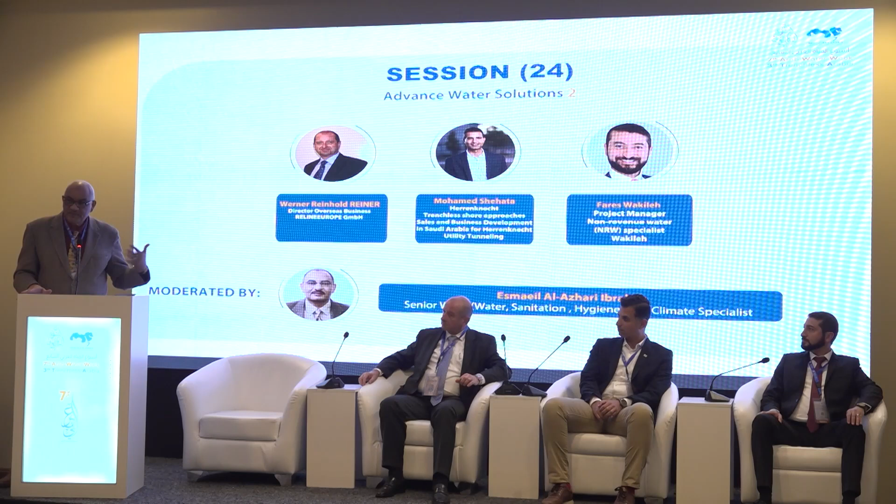Let's start with an international lesson learned by Werner.

Werner has a civil engineer background for 33 years. He's actually younger than me by 1 year. I don't want to mention the age, I'm over that step. Excuse me, do you understand English? English is fine, yes, they are. We understand. And he's more younger than us.

Thank you so much, this is very encouraging. He has been working in the pipeline industry and sales, and he has worked in lots of places, such as, of course, he started in Europe, Asia, South America, and Australia, and Africa, and probably in the Middle East also he has done some work. He will be talking to us about it.

I forgot to mention to you, my name is Esmaeil Ibrahim. I work with Aqua as a senior water, sanitation, climate consultant. Worked for United Nations for 35 years. And now I'm also a senior water and sanitation, climate policy analyst, part-time with United Nations. Werner, you're welcome to the presentation, and let's interact.

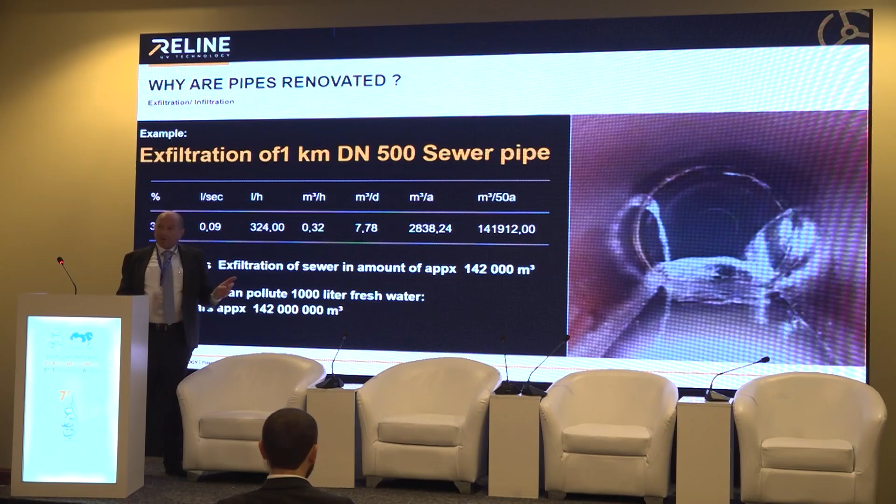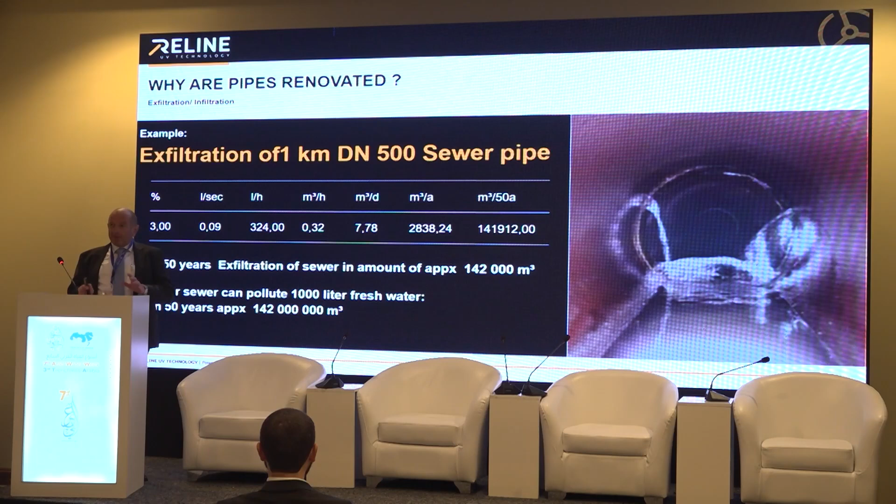If we understand that in 1 cubic meter of water, 1 liter of sewer pollutes it, and I'd say even more than that, you won't drink it anymore. Multiply this amount by 1,000, in 1 kilometer of a small pipe, we pollute 140 million cubic meters over 50 years. This is what a cracked sewer pipe causes to the groundwater, where groundwater is precious for potable water.

Europe. Loss of water from source to the well, on average 30% loss. We have countries on earth with 50-60% loss. I know Jordan is not less than 50% loss of water. The lack of water on one hand, on the other hand, we are having the water, and we are missing it over a few kilometers, half of it.

One step back. How long does a pipe last? Literature and experts say anything between 60 and 150 years. I'm pretty sure it will not be 300 years. Any asset owner can make his own assessment. He decides his pipes last on average 200 years, and he's happy.

If you take the 150 years and deduct 50 years already elapsed since construction, it's an easier calculation for me, 100 years. If the average life cycle of a pipe is 100 years, that means any asset owner needs to renew his network by 1% per year just to keep the status, with no improvement, because the other 99% will get older already. So every year 1% to keep it.

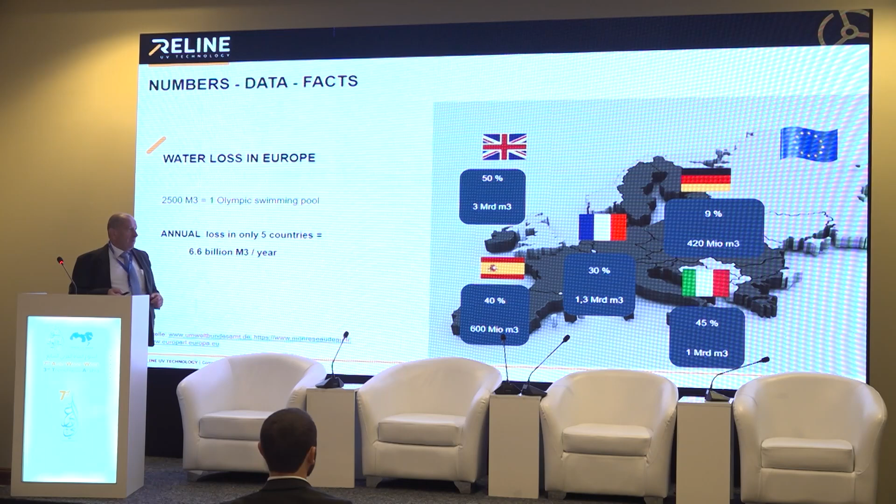In Singapore, they do renovation now at 28 years. They have a simple rule: in the age between 20 and 40 years of pipe age, they make inspection. If they find something, they renew. If they find nothing, they leave it. Anything beyond 40 years gets general renovation. They've got the money, okay, they can do that. This is their rule.

China has public pipes of 3.4 million kilometers, sewer pipes about 1 million, and they say the 100-year rule would mean 18,000 kilometers per year in the country. They say every 50 years, same style renovation. We are financing China, they can do it.

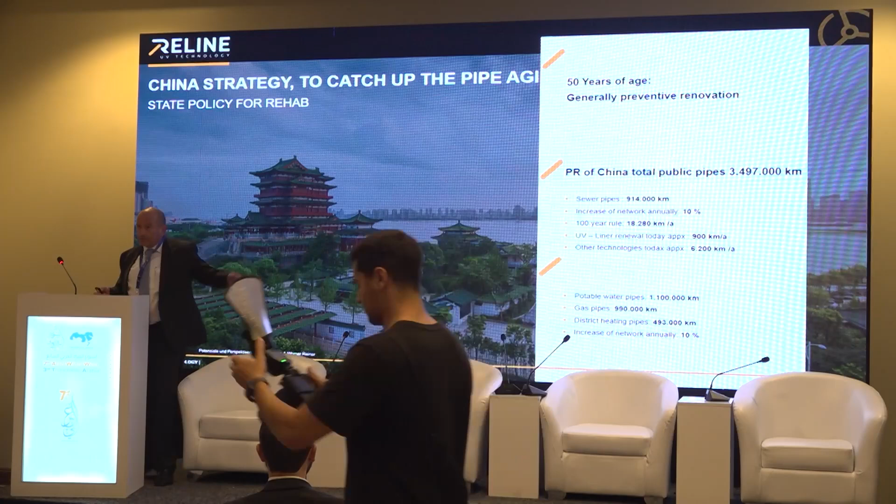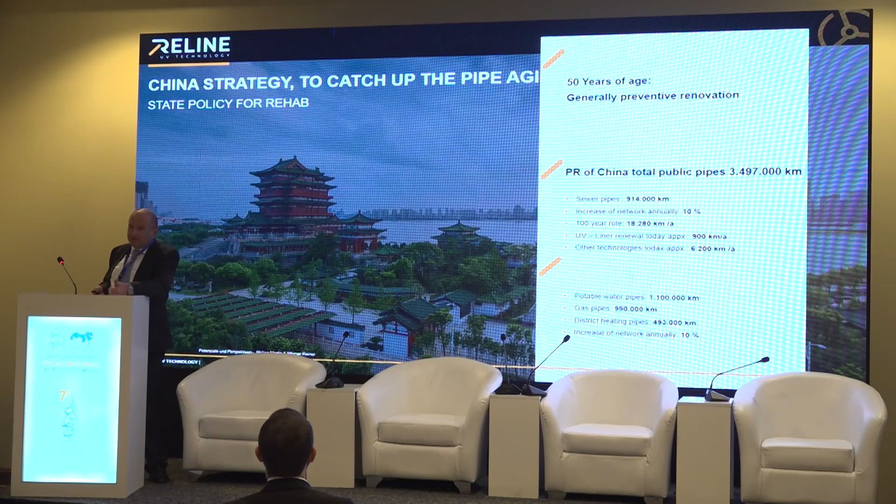Other countries need to look at our spending. We don't have that kind of resources, but we need to be aware that 1% or 0.5% is a guideline we should go for. This is what I said before: take the calculation, 50 years consumed, 100 years remaining, 1% in general, with discussion of the local situation which depends, but we are plus or minus there.

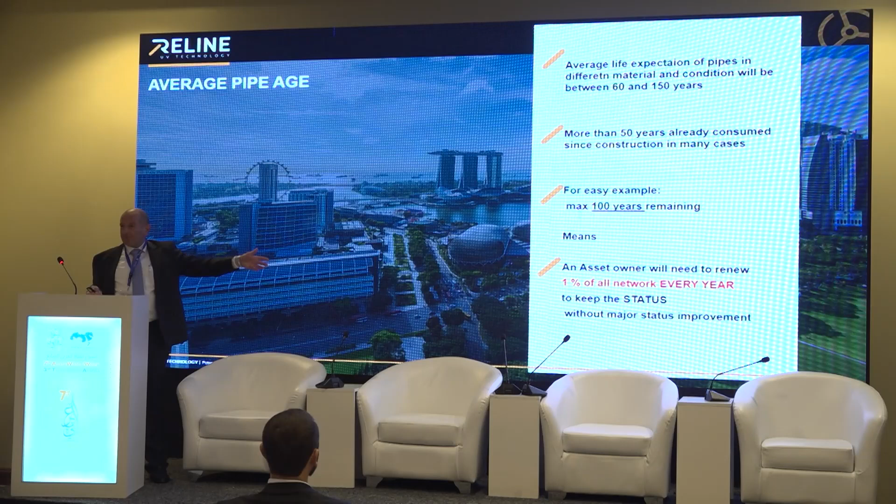What can we do? We can do open cut. I'm coming from construction, so this is a good solution. But I doubt that we have the time to reconstruct everything in dense cities with open trenches. And I doubt that we have the money for it. But I think the time is more nervous and sensitive than the money.

In the inner cities, we can't open the road anymore like this in the metropolis. So lining in general with different systems is a good option. I want to show you one of the options. There are several ones for slip lining, and we can do different methods.

The demand of lining is the quality of a new pipe. I don't talk about repair - repair has a short lifetime expectation of about 10 to 12 years. I talk about renewal, meaning tightness, stability, duration, and performance in practice like a new pipe. This is renovation, and the ISO standards say not less than 50 years - not about, it is 50 years. This should be a minimum assessed by standard-based assessments, not less than 50 years. That's why my calculation came before on the 50 years.

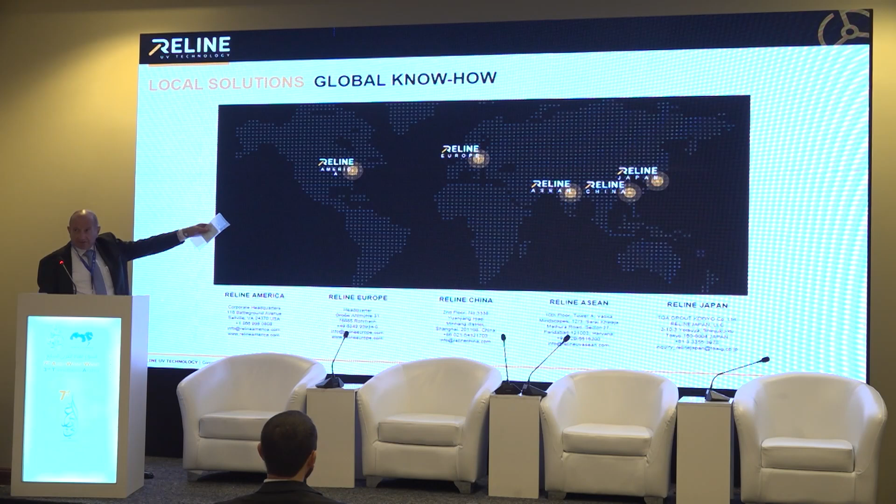We serve different regions, America, Europe, this is where I'm living. We had started a factory in China, but after COVID we skipped that, we couldn't access it for a year. The building was there, and then the government rule prohibited us to continue, so we stopped it. Maybe it wasn't too bad, because I see a lot of copying going on. We have 2 factories in Japan, because they do that for earthquake protection.

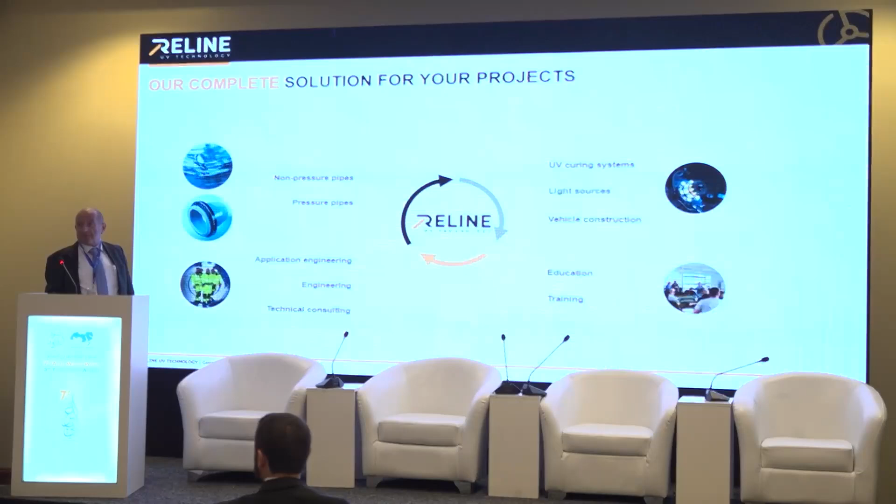For non-pressure or gravity pipes, and pressure pipes, we handle potable water or any other medium, raw water, industrial, not oil, not gas. We provide the systems, the curing systems, and we do training and education sessions to enable local companies to install the materials.

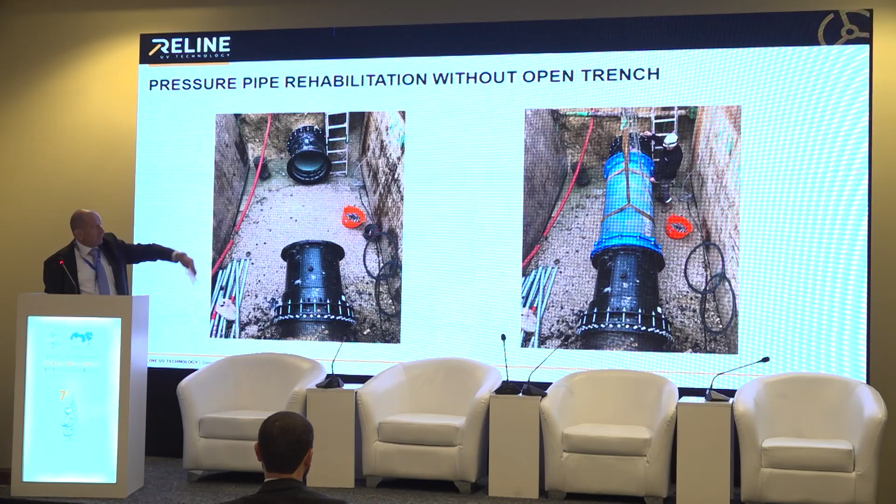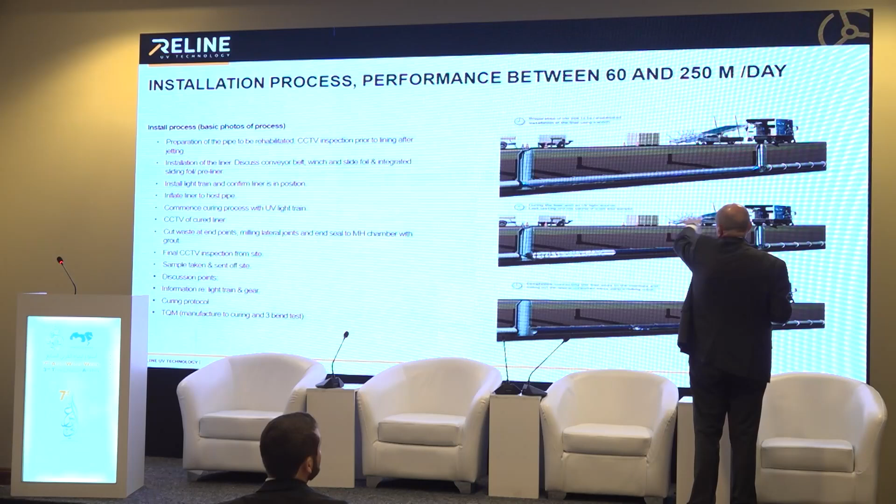After installation with the connector, and before filling, the potable water pipe is here. A few words on the installation which I explained: you have the empty pipe, the liner, which we call the liner, differently packed, but this is more for visuality.

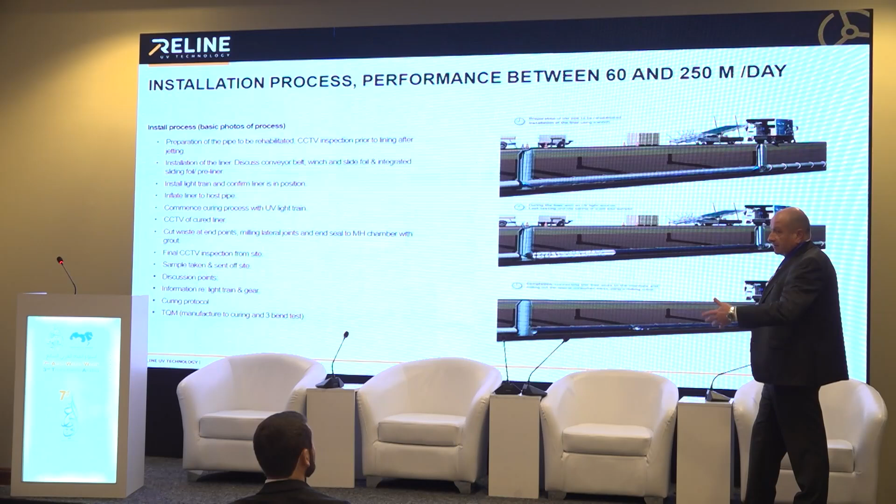This is filled in, pulled in, and then cured with UV light from the machinery. After that, cut, reconnect, and at the end this material is compressed. This is loose, but it is stretched with pressure, and after curing it's the same material.

And this is from a 2 meter diameter, same thing, we made this. I was there, I said, cut it for me. It was in Korea, in Busan, in the south.

This is my personal sample, I always carry it with me, I don't give it away. I had to cut it for a ministry; it was wider before, and I said give it back. They said give it for 2 hours, we cut it, I said give it back to me please. Yes, I do, and now it's only half. But this is now my personal sample.

This was a section 220 meters long, 2 meters diameter, with this thickness. The box folded along was 32 meters long, 2.8 meters wide, 3.5 meters high, 45 tons, one piece. Pulled in 4 hours, inflated in 2 hours, hardened with the machine in about 16 hours. So after 3 days, 2 meter diameter, 220 meters, reconnect, go.

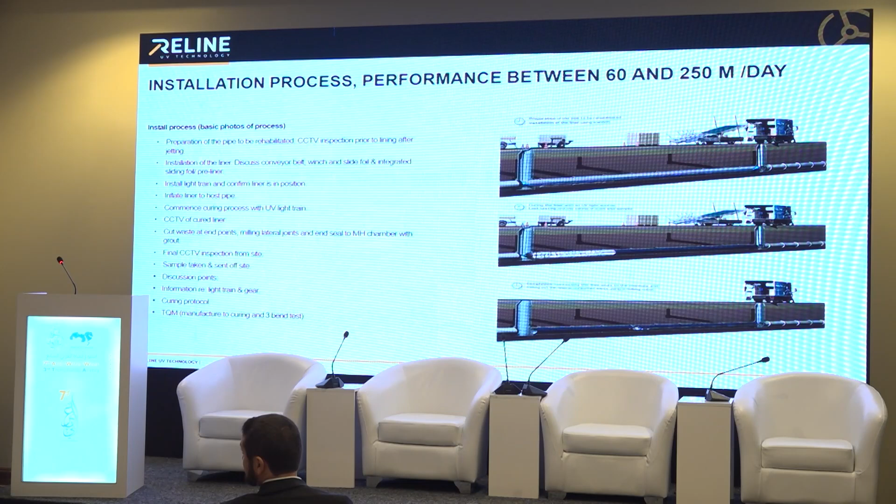For any lining, not just slip lining, you have to prove a lifespan of not less than 50 years. There are ISO standards for design, tightness, abrasion, and pressure; they assess the material for not less than 50 years. This is what we have to show, otherwise we are not in the category of a renewal.

As for cost reduction compared to replacing the line, the material itself is more expensive than a normal steel pipe or, in gravity, a concrete pipe, but the duration is a saving.

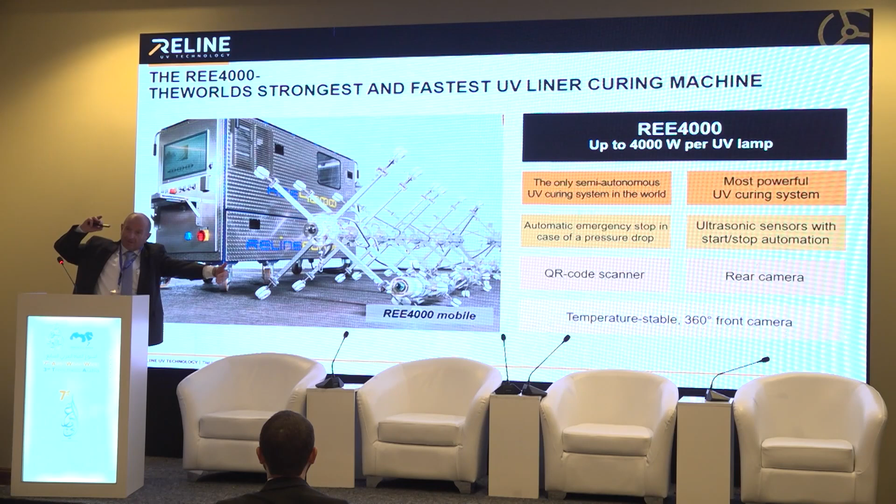This is the machine who guides the process. You have seen the material is put in. Then this light train, the one with the lamps, has flexible parts, so it can be levered down and fed in at one end when the other end is closed. When the compressor air is lifted up, the material lifts up as you blow air from one side. It's good enough to shift that in and close the other side.

Connected with the cable, the machine has a QR code scanner, so the material itself has a personal QR code which gets read by the machine. The machine knows, okay, this is diameter 2 meters, this is 24 millimeter, and this is my speed. Then the operator presses the start button, and the machine pulls the light train with a controlled speed through the pipe and cures it.

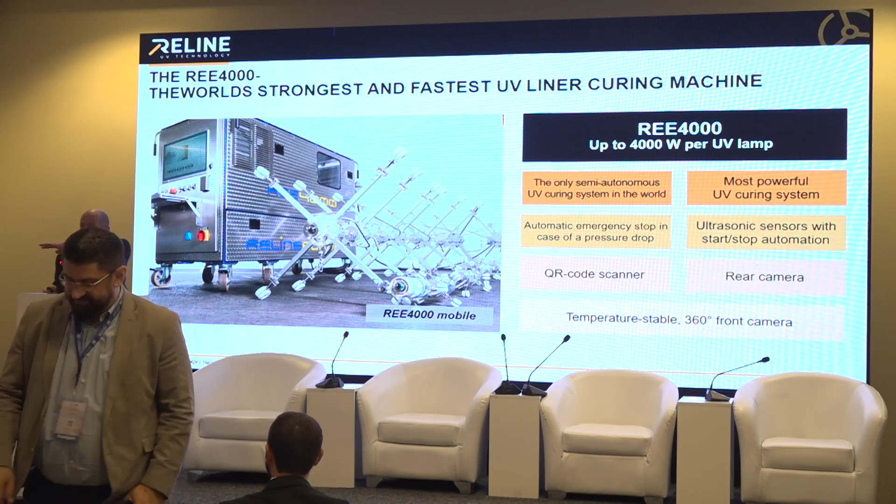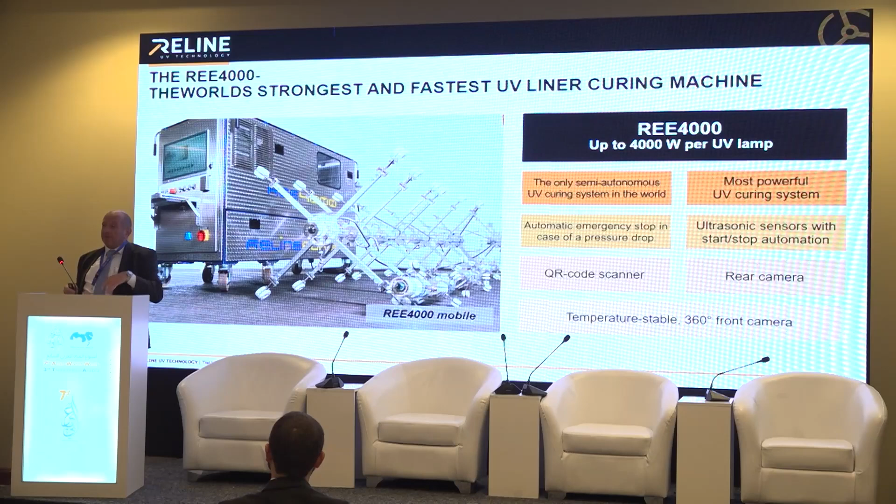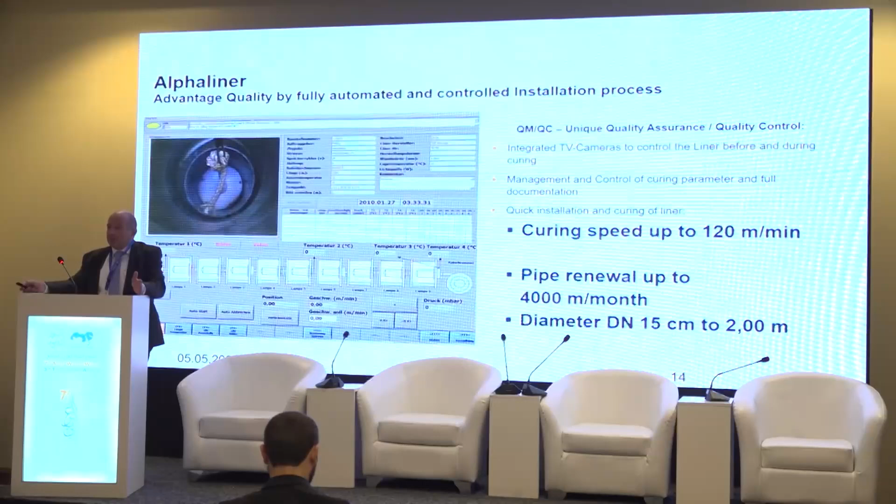This is the control panel. Everything is recorded: pressure, speed, temperature, and so on. At the end, when you talk about quality control, every product has a quality management system, it has a quality report, but that ends at the factory door. Full stop. Process, quality, delivery, invoice, pay, done. There's a warranty period, yes, but the quality control is over.

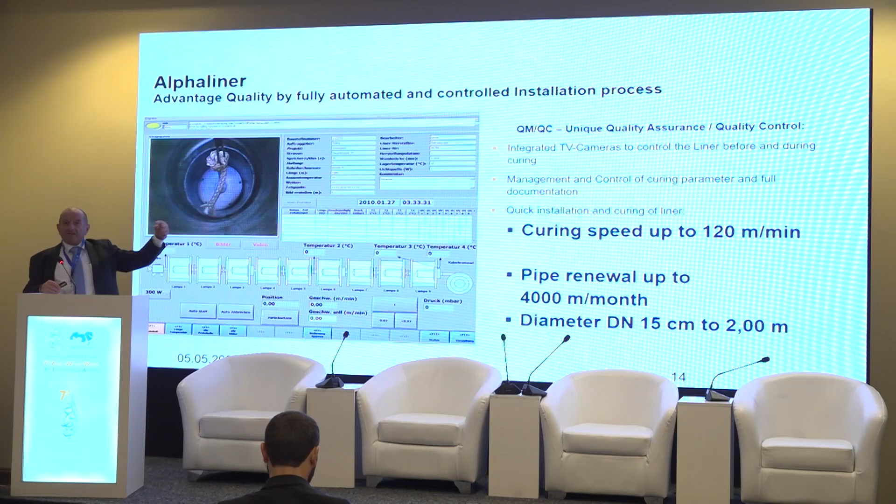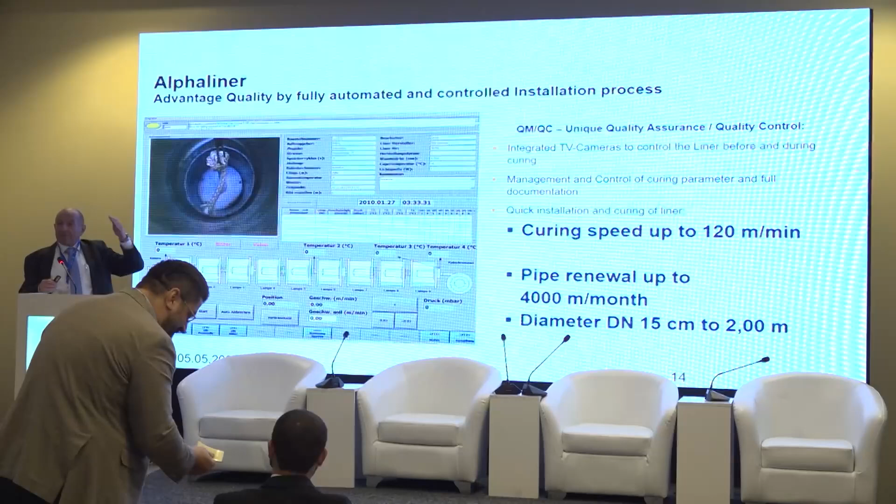In this step, when the liner has a QR code fed into the machine, and the local curing parameters work on top to complete the process, there's a complete installation record till the final finish of the product. We won't have that, not even in a new steel pipe, because when it's laid, it's only the quality report from factory, nothing on site. There are only installation steps, but not a complete ID. This can be given to the company owner or the pipe owner as a final quality ID.

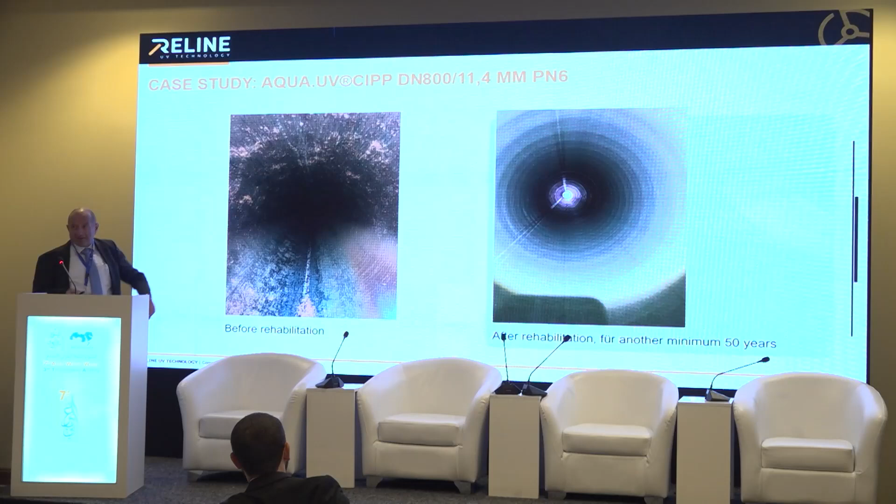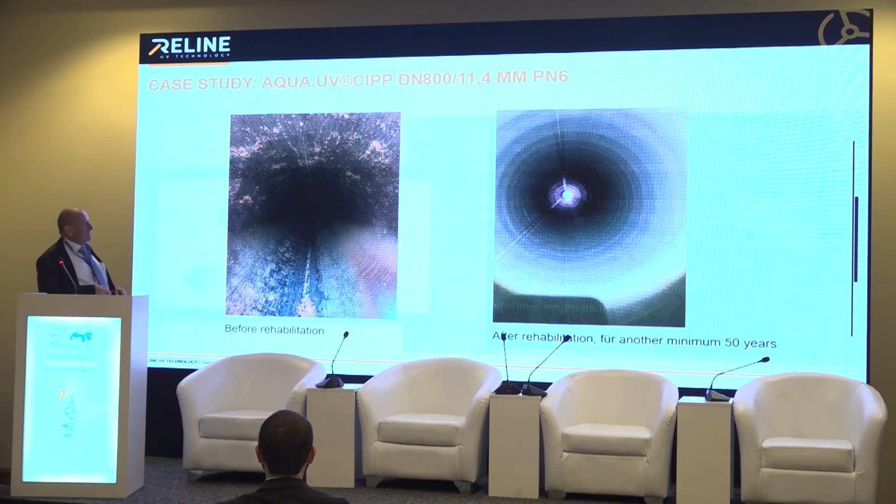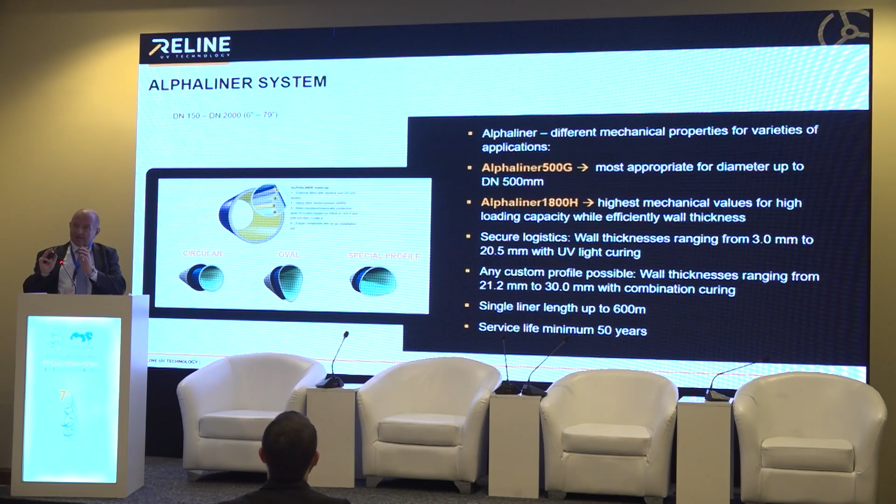Different shapes are possible because the material itself is flexible, it follows the circumference. So even a box shape can be made, or oval. It's only about the circumference. The material is made with downsizing and has a stretching tolerance of about 10% to match the real process. The material glass is wrapped like a bandage, with different layers. In gravity applications, it has an additional abrasion layer.

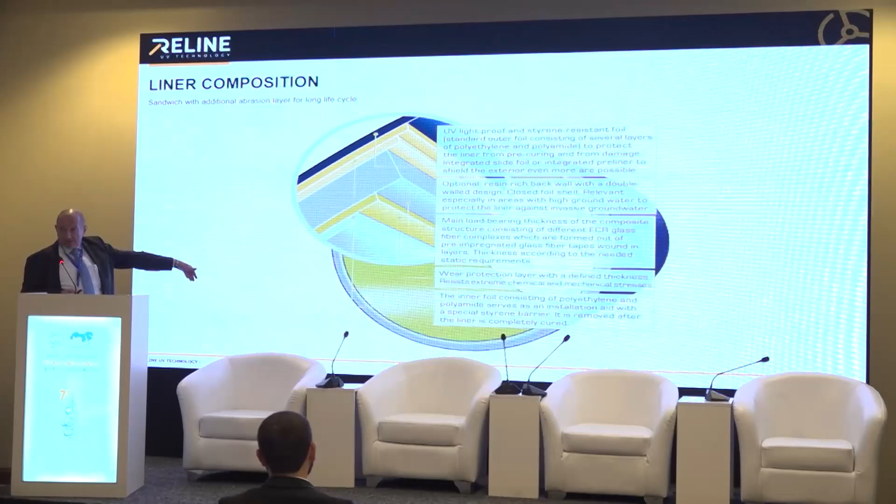My wife says, why do you always go next to the manhole?

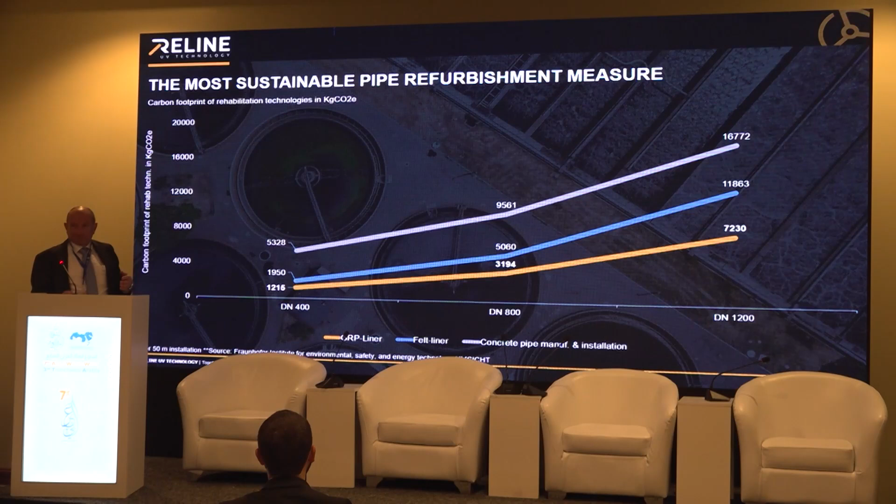With some asset owners, this is an argument. Some say, for me, only money counts. So, for you, as information.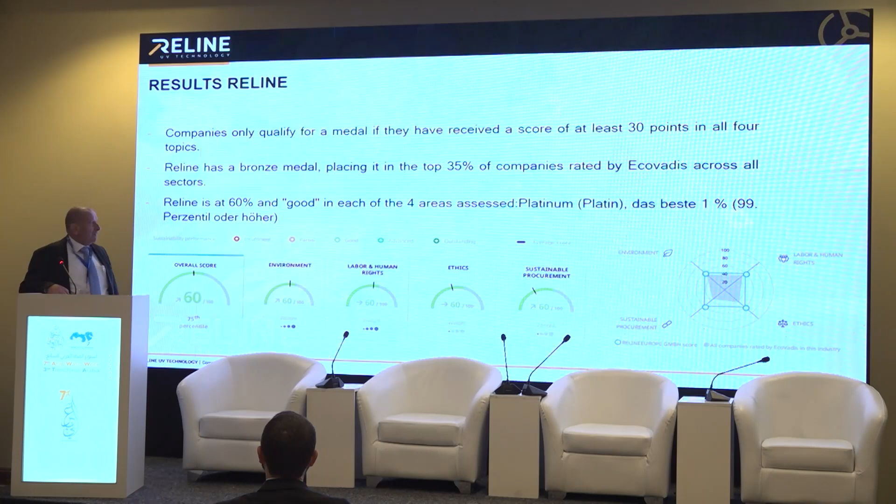Thank you very much, Rainer. I think it's very interesting, and I've been working in the sector for 40 years. It's the first time I knew that pipes have age. I know they get rotten, they get ruined, they get damaged, whatever, but now they have age. Very interesting. And the second issue, they can be rehabilitated while they are in the ground, and it again has to do with the cost, if somebody wants to compare between putting a new pipe or using an old pipe and its condition.

Anyhow, colleagues from Amman, please keep your question if you don't mind. The second presentation we put, as I mentioned, as a debate because we are few, and then we need to exchange views and help the presenter also.

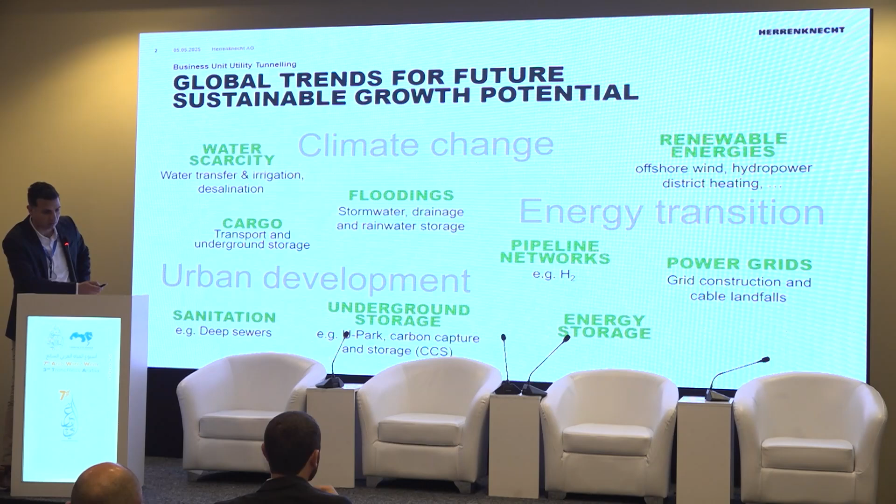So this is actually where we live: in the sector of energy, water, sewage, infrastructure in general. My focus today is on the water scarcity point and flooding, also sanitation - that's where our machines or our technology get applied. So, as I said, focus on sewage desalination - that's where we think shore approaches might be existing.

And this is the main idea of shore approaches. Shore approach might be like an outflow, so we bring water from land and just throw it in the sea. Or the other way around, we take water from the sea as an intake, for example for desalination plants, and so on, or for cooling, for example.

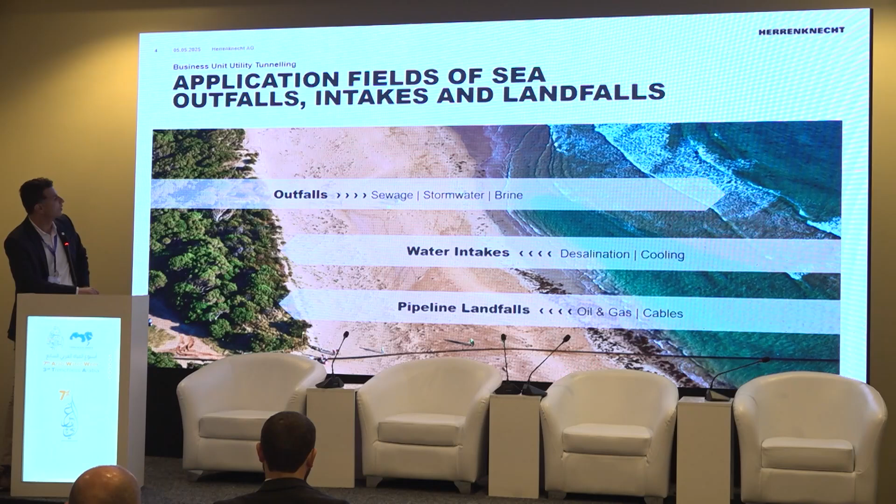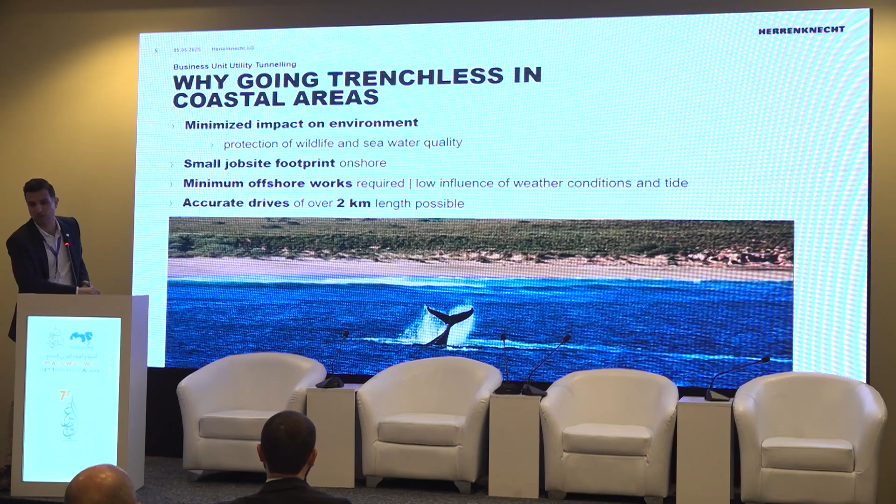The goal of this technology is to minimize impacts on the environment, either the marine environment or on the land side, and also the accuracy and clearness of the water we take or bring to the sea. Because what we take from the sea, for example, we somehow treat it, so we try to take the cleanest possible water, or reduce the treatment process as much as possible. And also the other way around, when we bring back treated water in outfalls, for example the very saline water back, we don't want to bring it to the shore, we bring it deep in the sea where it can dilute after that.

I like this picture because it shows our machine portfolio. What we're talking about right now for shore approaches is mainly done with these three circled machines - we're going to talk later in depth about them. But it's also nice to see the rest of the portfolio.

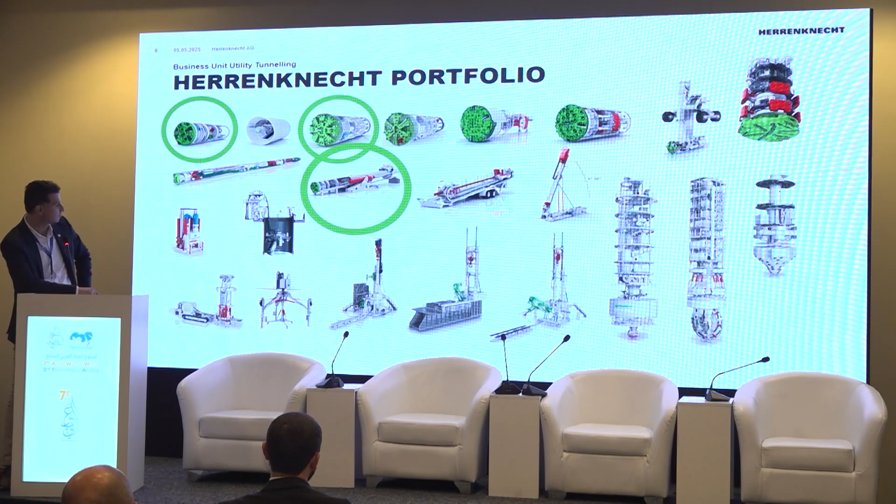So the general idea of shore approaches is very simple: we want to make a connection between a point on land and a point at the seabed, at a depth of 300, 400, 500, 800, or 1 kilometer deep. So we start from a shaft on land, onshore, and we bring the machine down. The machine starts excavating underground, also still in the water area under the seabed, till we reach the point where the machine comes up, and then we have our line, which we either use as an intake or an outflow.

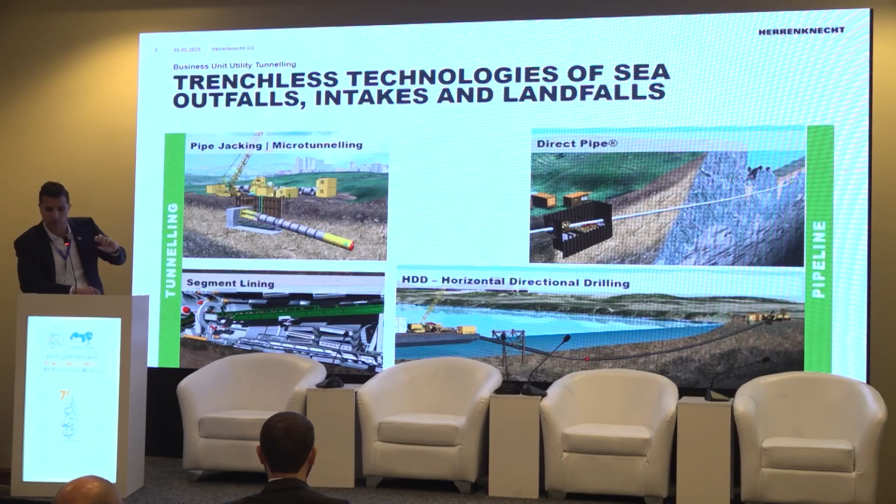This is done through different technologies, same technology but different machines. The selection of the type of machine is based on the type of the whole project, like depth, length, and for sure the crucial point is the geology where we are doing the excavation. I will talk briefly about the machine technologies, but mainly the application is the same, which is this connection between onshore and offshore work.

We're going to talk about the pipe jacking method, which, from the name, explains itself - we're just jacking pipes after each other till we reach, for sure behind the machine, till we reach the point. This is an overview of a job site right on the shore area.

Here in the middle, this is the shaft where we start jacking from. We have the pipes, we bring it down, and we use the jacking cylinder to push the pipe behind the machine, and the machine starts excavating. In the front you see the machine, the yellow part, start excavating. In this technology, we are moving the whole pipes behind each other, so as long as time goes, the more force we need. That's why for this type of machine, the length I can excavate is somehow limited, because I need more force to move longer lines.

The most interesting part, because what I just explained is a standard tunneling process, but what makes it different here in the outfall or shore approach is this point where I reach the target point under the seabed or at seabed, where the machine has to come outside.

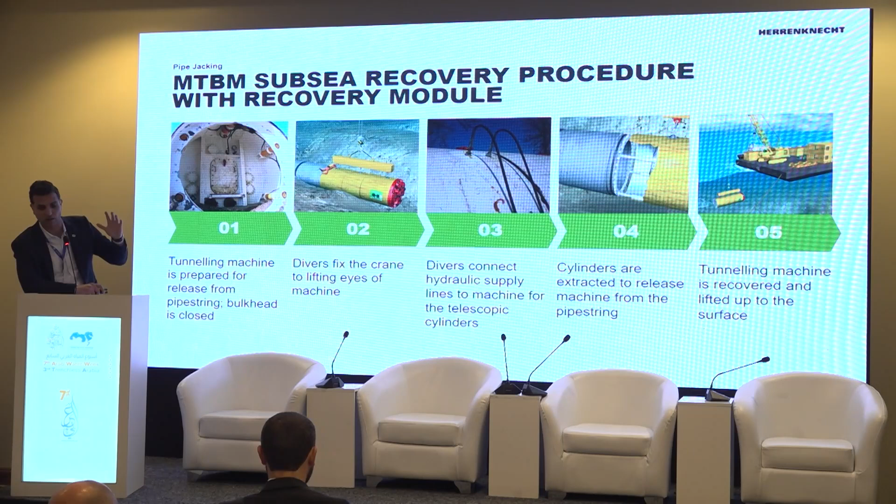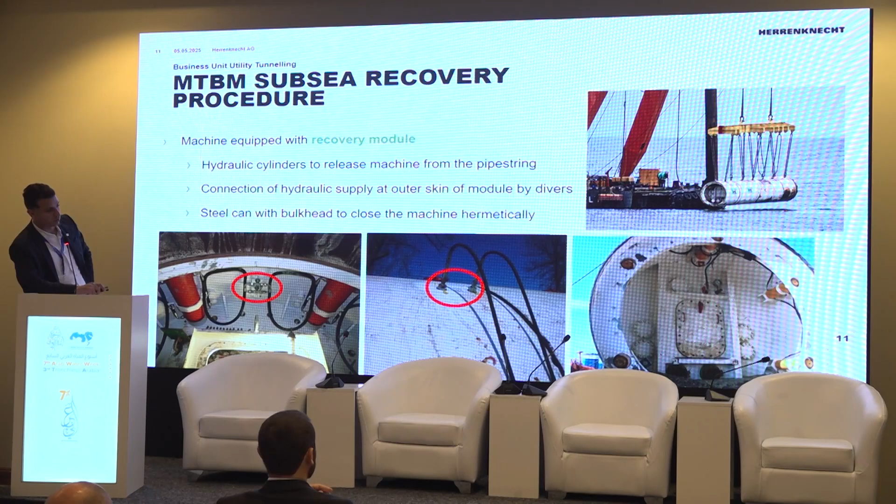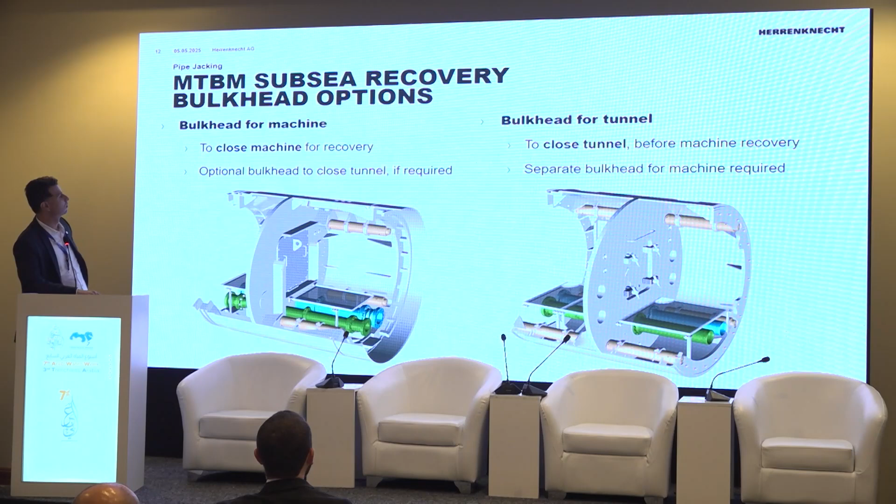So this is the extra part that is connected to the machine if the machine is planned to make this offshore approach. Either you lift it with the crane, or you just let the machine go up using airbags. So it sounds familiar from diving.

We have some reference projects for those applications. I selected the projects to show here, which are in our region. So no one should think it's a very advanced technology used only in the US or in Europe. No, it's been used here in our region.

So the first project was in Algeria. It was a desalination plant. They made a sea outfall for 240 meters from the shaft, so the starting shaft, 240 meters in the sea. This was a recent project, and the recovery of the machine was in November 2022. It was done very successfully, and that's how they did the outfall for the desalination plant.

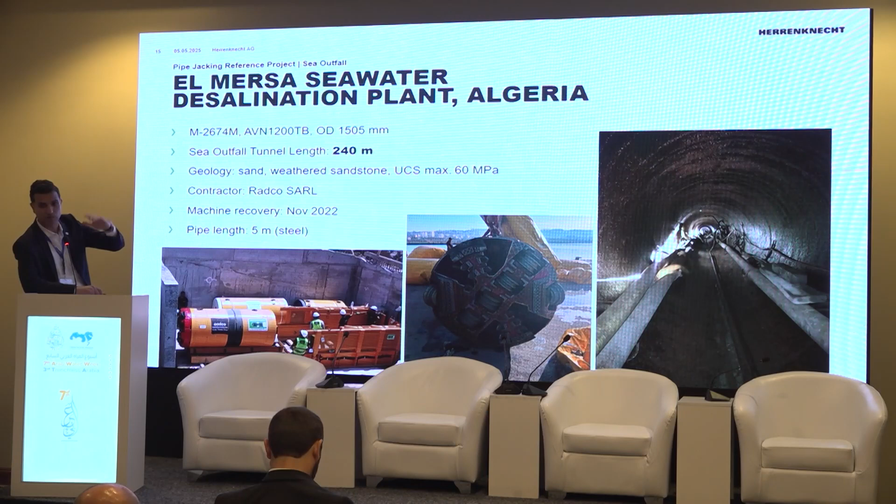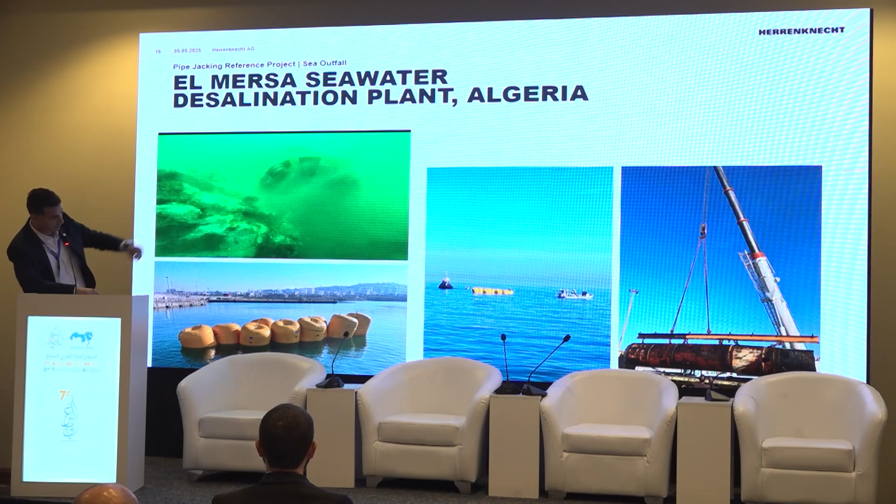So after the desalination process, there's very saline water remaining. They have to bring it back to the sea to be diluted again in the seawater. That's the technology they use. Here are some photos, real photos from the project. So the machine comes here at the seabed, and then it was lifted with the airbags and then the crane.

Second project was also in Algeria. It was a 2,500 machine diameter, inner diameter part. We have 3 intake lines, and as you can see from the drawings on the right side, 3 intakes and 1 outlet. So all 4 of them were done with the same technology, which is the outfall intake, let's say, package.

The challenges in such projects are mainly the depth where I'm excavating, because I have the pressure of the whole sea above the head of the machine. Also the type of geology, which is below the seabed.

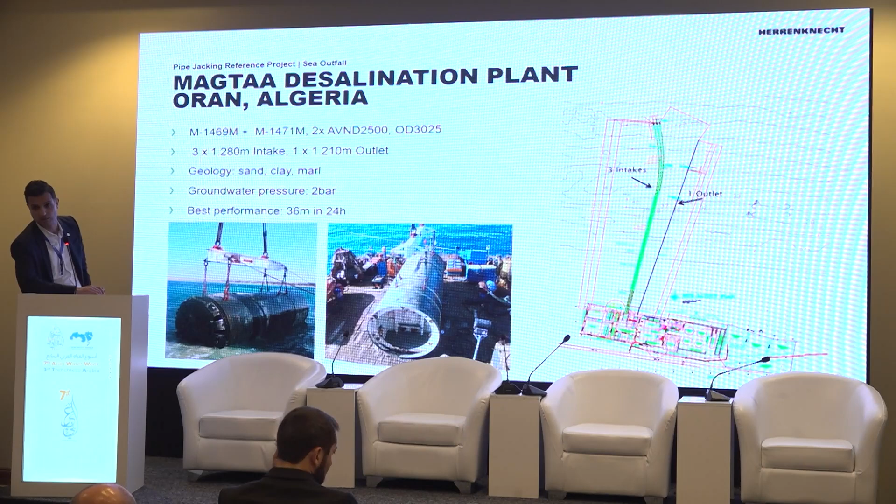And it happened. They had a project financed by the World Bank, and this Spanish company made the first, let's say, trenchless project in Jordan. It was for the rehabilitation of the lagoon area in Russeifa, Pepsi Lake exactly - I was not sure what the official name is. So this was the pipe-jacking technology. This was our machine.

This here is again more information about the desalination plant in Morocco. This, on the right side corner, is the picture from the shaft, from the job site, the starting shaft.

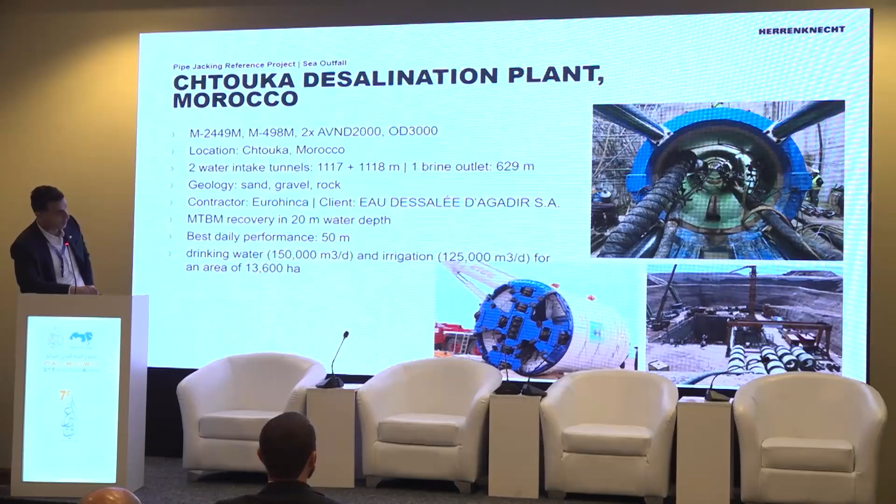Next reference is in Kuwait, also a sea outfall. This was a water treatment plant, and then the treated water was discharged through the Gulf. This was done by an English company, a British company, and it was a little bit a long drive - the outfall tunnel length was almost 2 kilometers, so it was a little bit challenging.

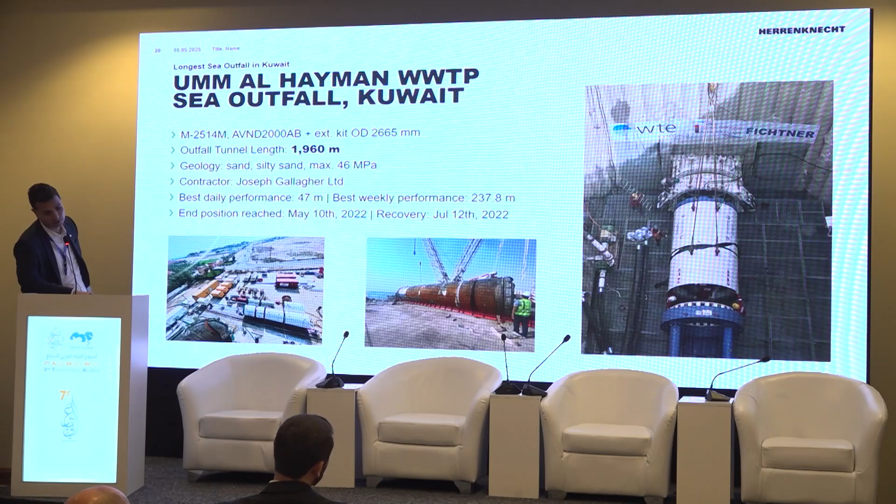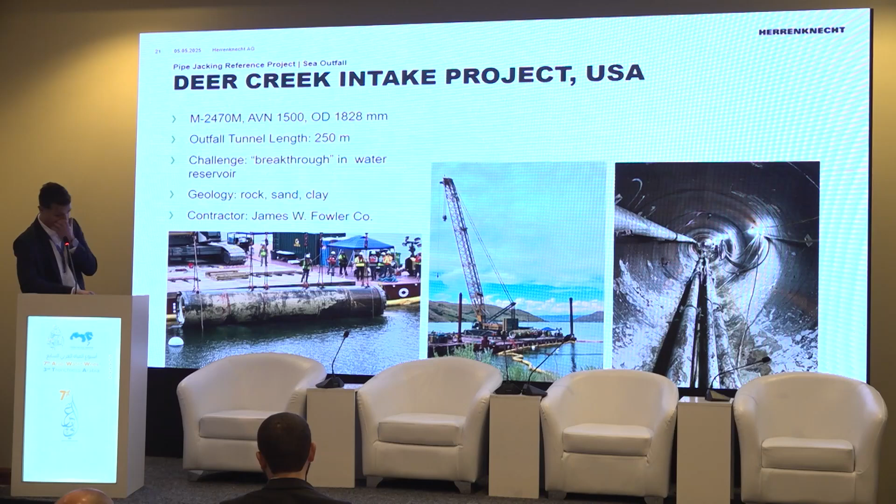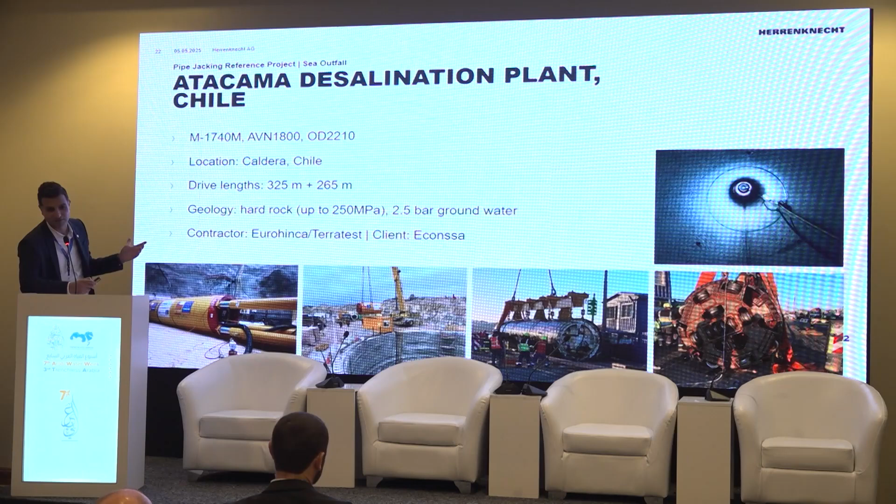Next, also in Chile. So we had projects in the Middle East, projects in the US, also in Latin America. So this application, this technology is used worldwide. For sure, it's related to the country being directly on the coast. So if there's no coast, then it will be difficult for this application.

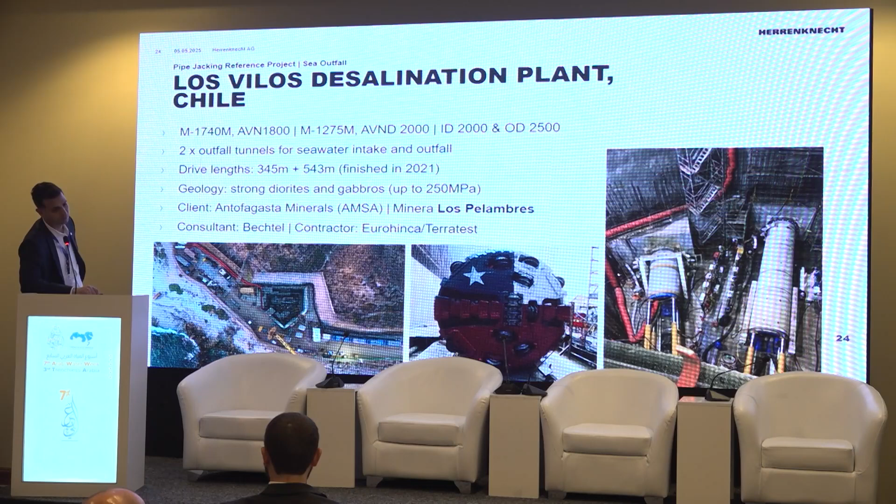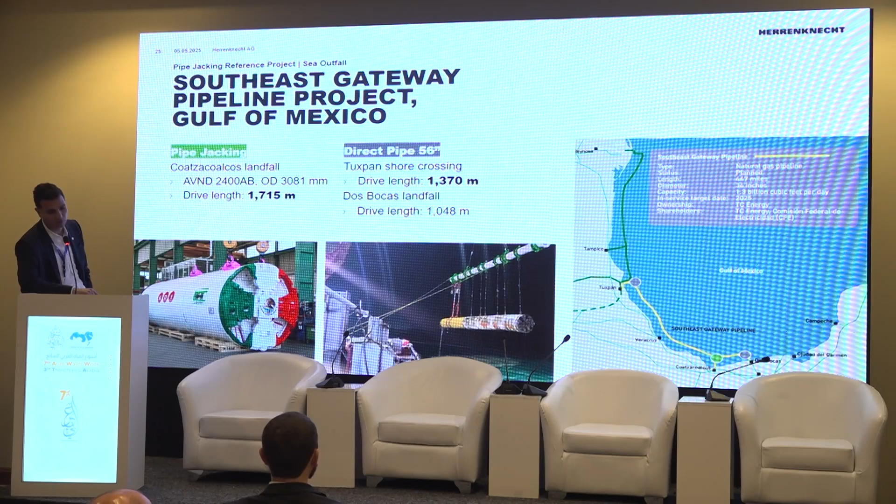We have more than 110 sea outfalls worldwide, so it's already proven technology used intensively in recent years. We have 2,500 meters that can be done for the outfall of the intake.

The same application can be done, as I said, with different machine types. This is another type, doing the same objective of the project, which is a connection between onshore and offshore point. The difference here is in the connection between the pipes and the machine. Before it was only a concrete, reinforced concrete pipe, so I had to push the pipe and then bring the second pipe and push the third pipe and so on. This type of technology is like a steel pipe connected, 12-meter pipe, already welded, and then we push it together behind the machine using this pipe thruster part. This is equivalent to the jacking force that we get from the conventional pipe jacking machine.

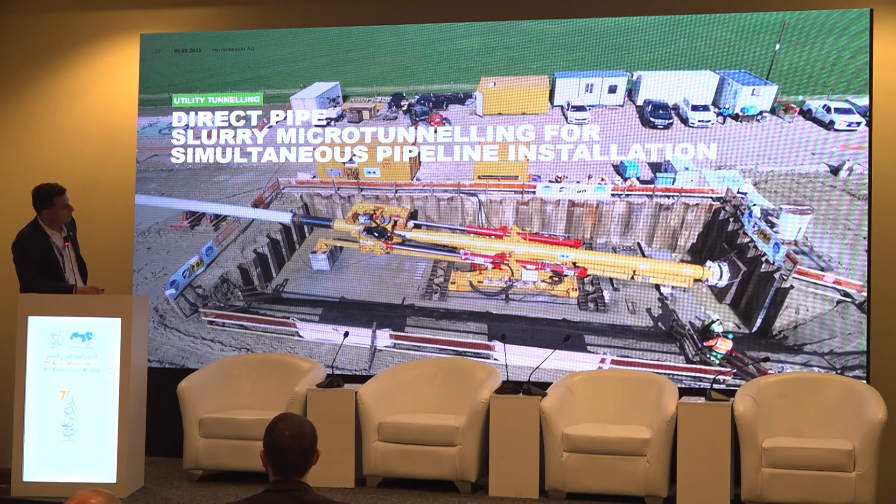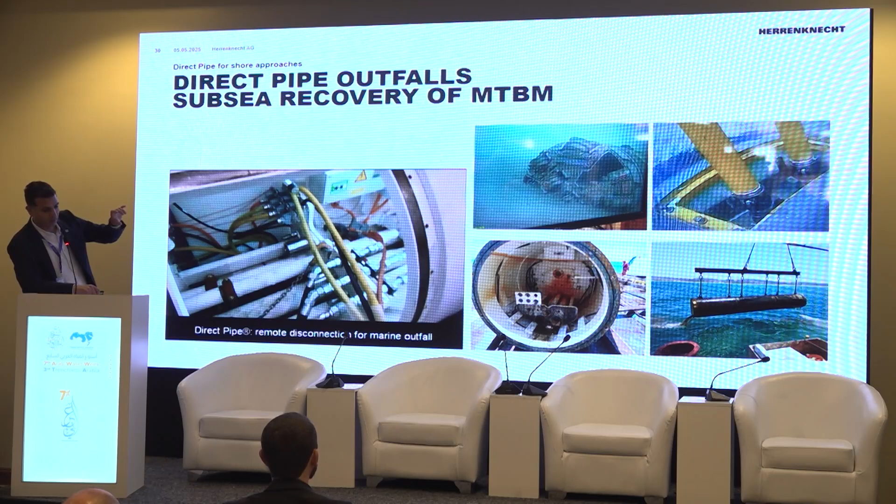This is, for sure, in some applications faster to perform the job. That gives us also an option. I will pass fast about the technology, also the project. Everything is the same except how we move the line behind the machine.

Project in New Zealand, I said this technology gave us the chance to make longer pipes. So we have here 2,000 meters, so 2 kilometers in one shot. Best daily performance was 42 meters.

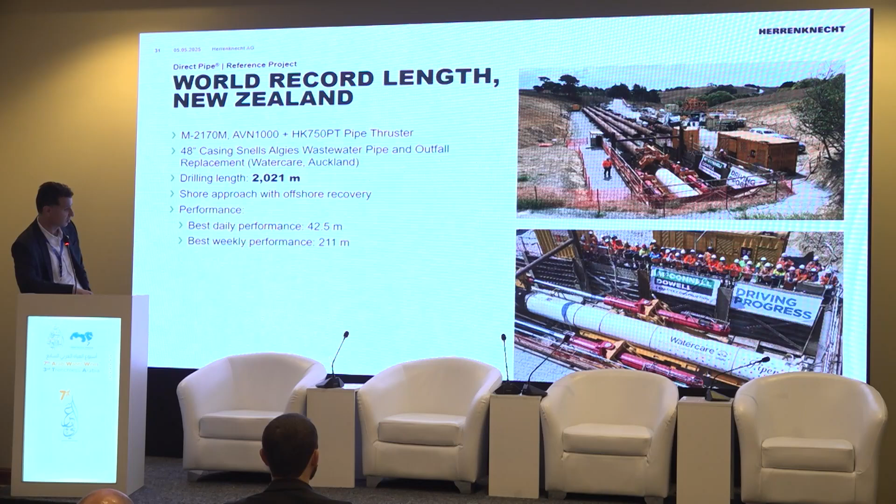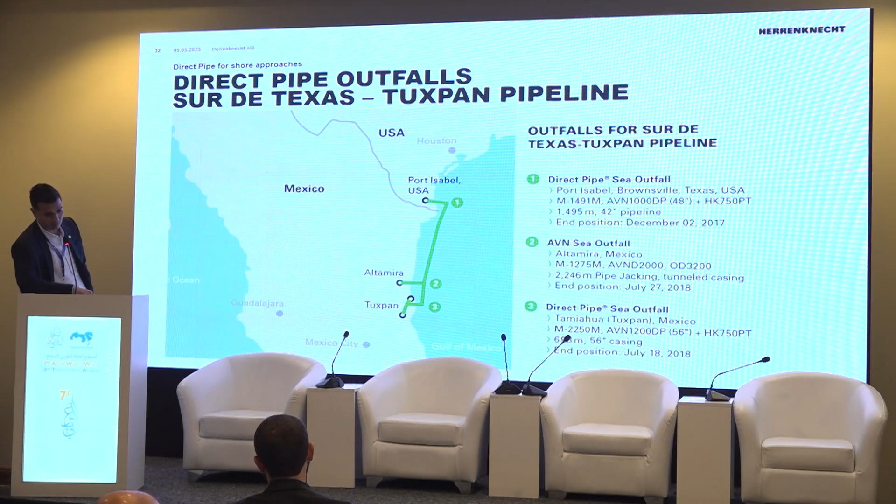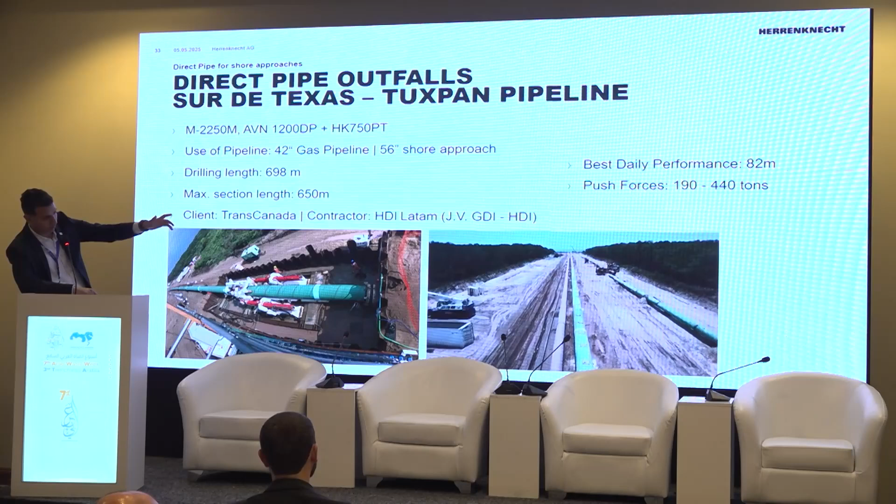Second one, already we talked about, it's the same project in Mexico, but we have also used this direct pipe technology for this project too. As you can see, this is the pipe behind the machine, and then you can work in parallel. So you make some welding in the pipes, and then after welding, then you do the jacking. Direct pipe.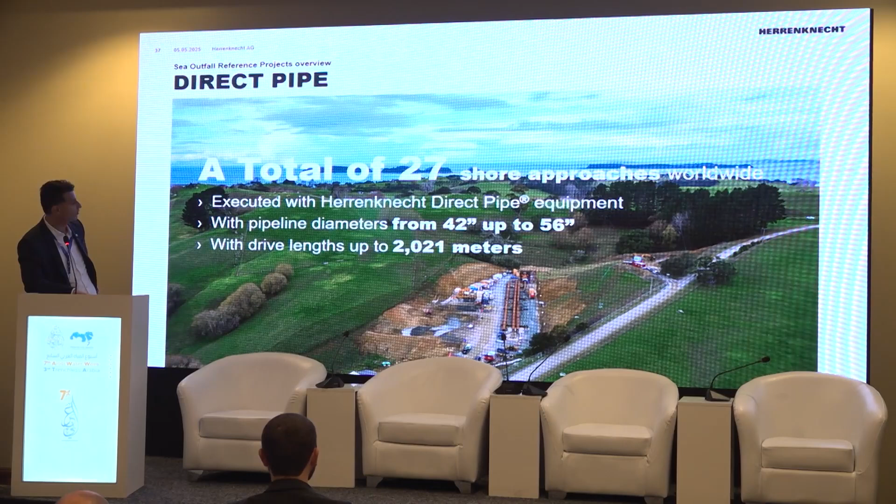We believe that this technology is somehow helping to reduce the scarcity of water in our region, because mainly the main application for this is desalination plants. With the direct pipe technology, we have a total of 27 shore approaches worldwide. We can reach 2 kilometers deep in sea level. Thanks a lot for your attention, and I'm ready for questions.

Thank you very much, Mohammed. Very interesting again to see the pipe jacking and also how relevant it is to the water and sanitation sector, especially to do with desalination and so on. It has various kinds of use, like cables and so on. But it adds up to what Werner mentioned earlier. Werner comes and repairs, but Mohammed and his company, they come and install. So, matching between this and this.

A question left for us to think about is the cost and the feasibility - how much is it going to cost and how feasible is it to your requirement. Although, it's very relevant to our area, because desalination in the Gulf area and in West Asia, North Africa kind of countries, they depend a lot on desalination.

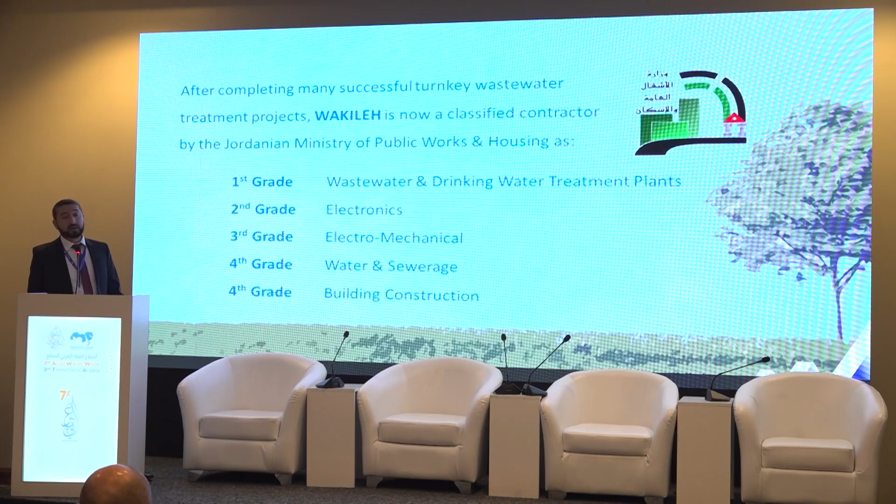After successful projects, we have been classified by the Jordanian Ministry of Public Works and Housing as a first-class contractor in wastewater and drinking water treatment plants, second-grade electronics contractor, third-grade electromechanical contractor, fourth-grade water and wastewater, and fourth-grade building contractor.

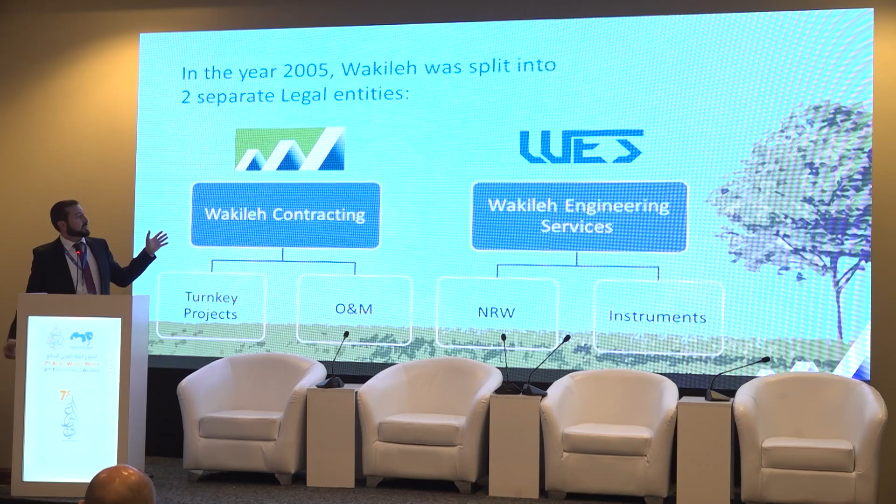In the year 2005, we were separated into two companies: Wakileh Contracting, which deals with turnkey projects and operation and maintenance contracts, and Wakileh Engineering Services, which deals with non-revenue water equipment and instruments.

Our mission is to provide proven solutions, save the environment, save fresh water, encourage plantation, and encourage the reuse of treated wastewater.

Our values: to provide solutions with integrity, to provide solutions with high quality, and of course we claim to be excellent at what we do.

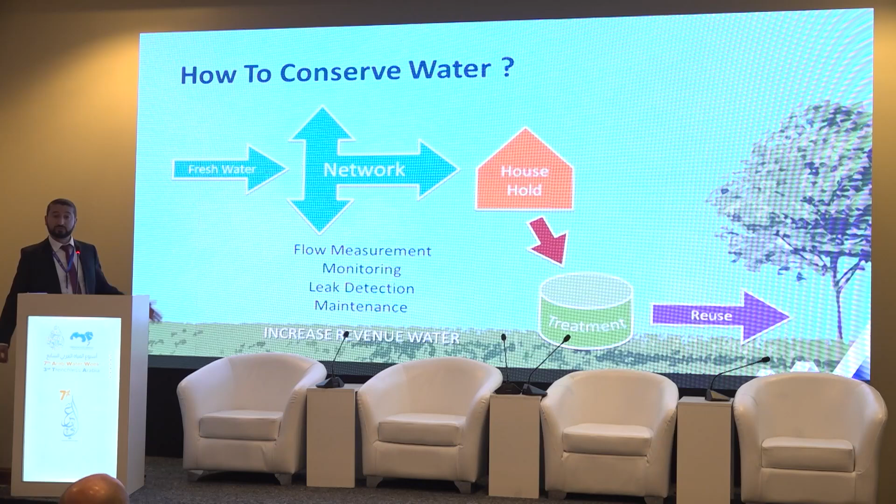How to conserve water? First, fresh water will go into the network. We do flow measurement, monitoring, leak detection, and maintenance. So we increase the revenue water, then the water goes to the household and is turned into wastewater, and then we can treat that wastewater and reuse it for irrigation.

How do we do wastewater treatment? We provide case studies, designs, construction, operation, and maintenance of decentralized wastewater treatment plants. The whole cycle of this helps us continuously improve and offer better solutions and better service.

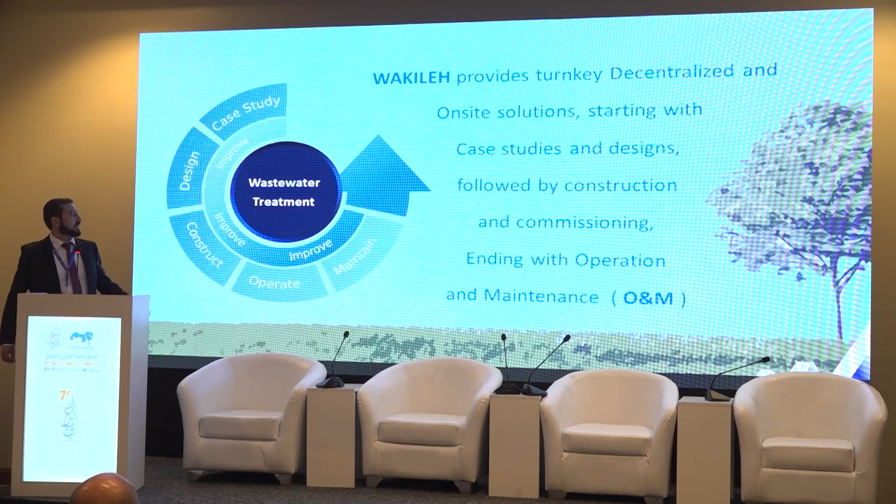We are one of the few companies in Jordan that have our own in-house laboratory to keep up with the water quality from the treatment plants we have.

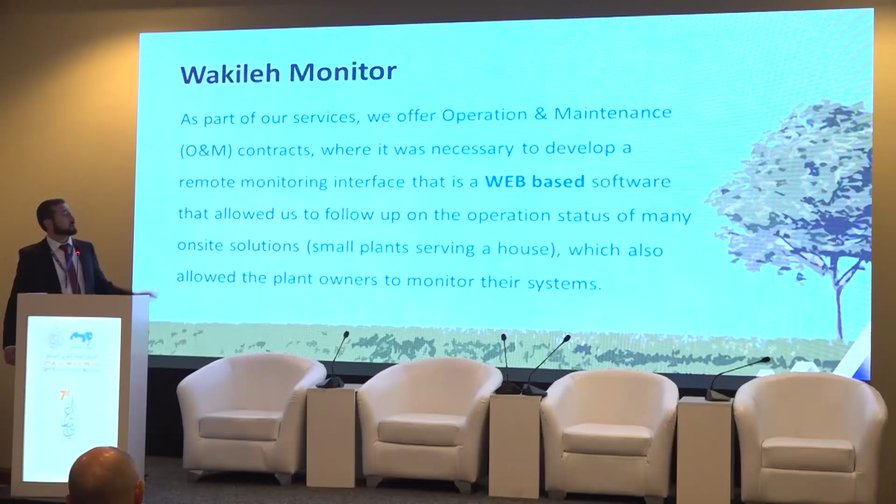Also, we have what we call the Wakileh Monitor, which is a small kind of SCADA system that we can connect several small wastewater treatment plants to, on one platform that we can monitor and check the status of the operation. This is a preview of this Wakileh Monitor.

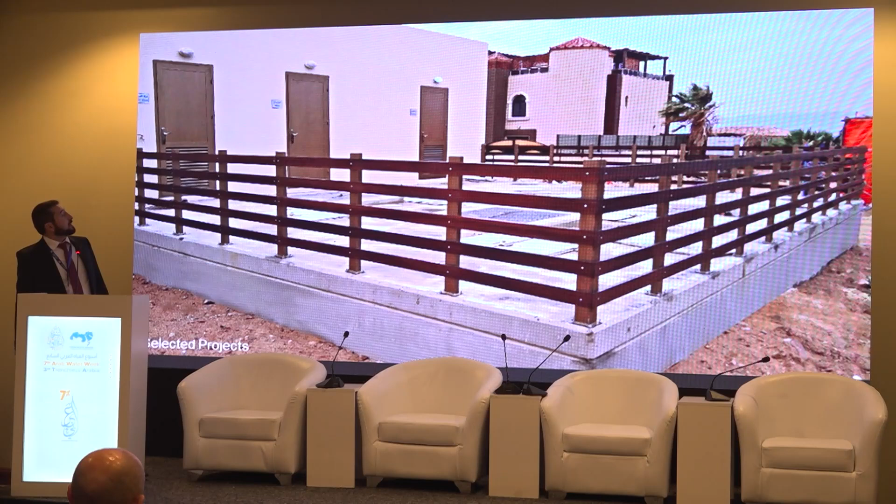This is in the University of Madaba. This is again in a hotel.

Also in Wakileh we do rehabilitation of existing old wastewater treatment plants. This can save a lot of money, investment costs in the wastewater treatment plant.

For example, this is in the airport. This saved about 5 million JDs of investment. This is in Madaba and the Raseifa camp project. Also, it saved millions instead of building a new wastewater treatment plant.

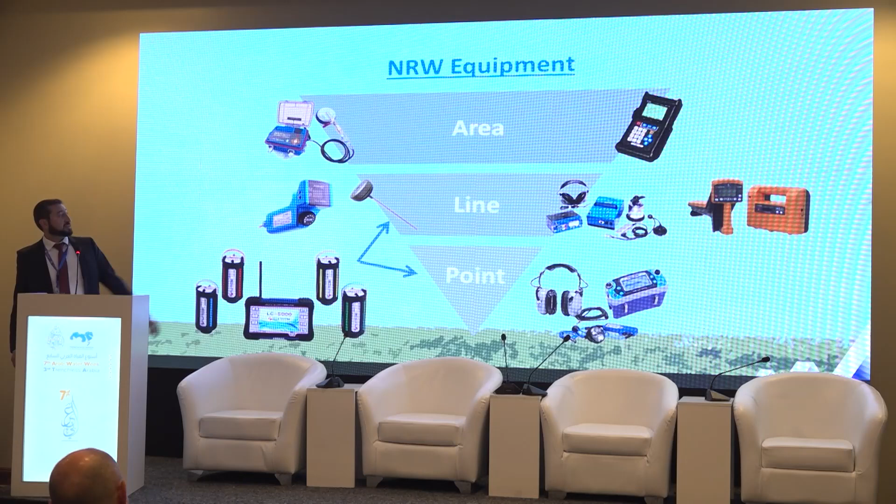In non-revenue water equipment, we provide the whole cycle of the triangle of non-revenue water: devices that serve to find the area, and devices that find the line to pinpoint the location of the leaks.

We have such equipment like the ultrasonic flow meter UFP20 from the company Tokyo Keiki. It is a very special ultrasonic flow meter that can actually be connected to two different pipes at the same time and can measure the flow from two different pipes.

It can also be connected to the pressure and flow data logger from the company Fujitecom, so you can have your data tabulated neatly on one table for the flow and the pressure.

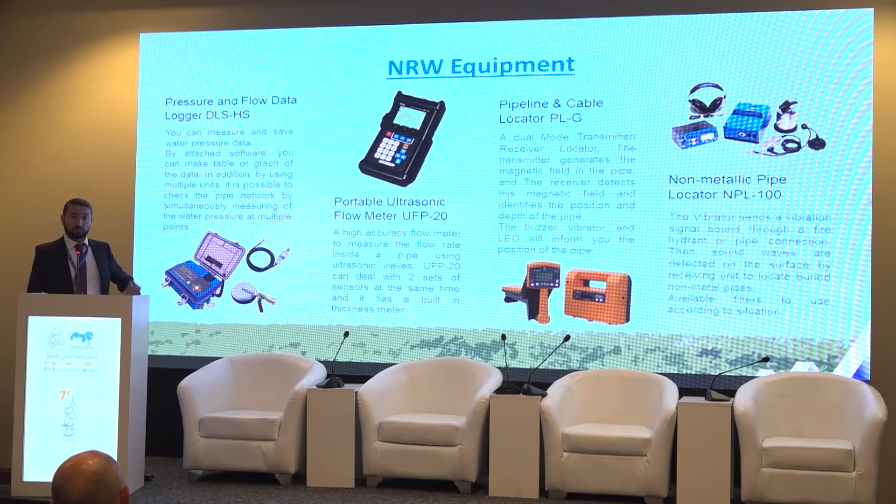Also, we have pipe locators, metallic and non-metallic. The PLG from the company Fujitecom not only can find the location of the pipe, it can also measure the depth where the pipe is. It has several ways to do this.

In terms of leak detection, we have the normal listening sticks, but also the digital listening stick, which is more advanced with a digital screen that shows the leak levels that we have.

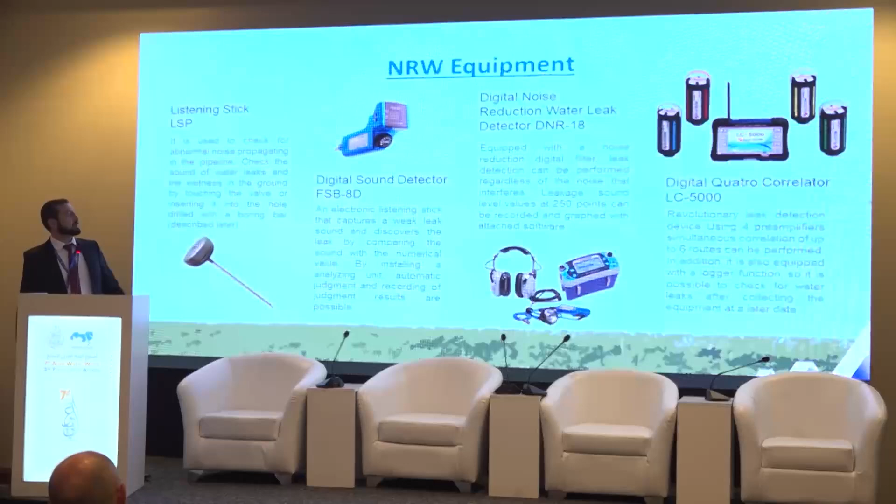We have the very special device, the DNR18 from the company Fujitecom. This device is excellent at finding and pinpointing leaks. It can do noise reduction, several levels of noise reduction, so you can find the leaks more precisely.

Also, the digital correlator LC5000 - this is the best device in the market. It has 4 different sensors, and it can find the leaks to a very high precision from each sensor, which can be connected to different parts of the network.

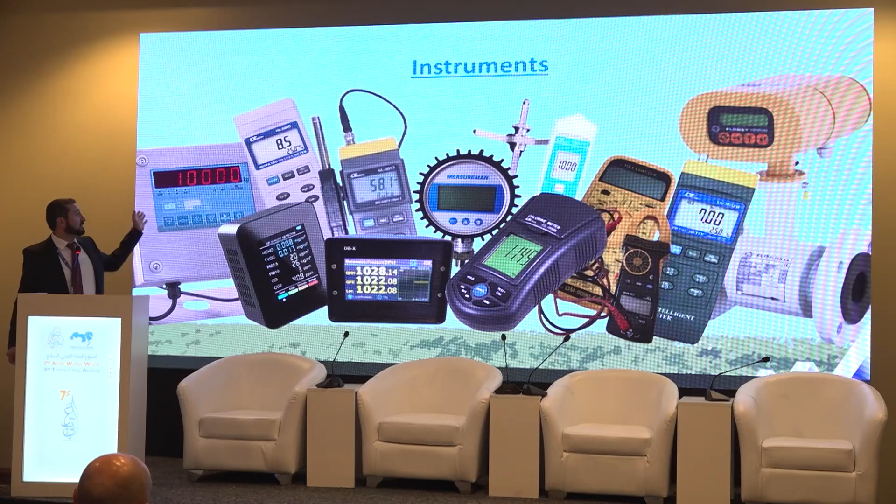Also, we have different kinds of instruments: flow meters, pressure gauges, water quality testing kits and meters, air quality meters, sound meters, weighing devices - a wide range of these devices.

Also, we provide the necessary training for every device, so our customers can actually know and learn how to use such devices, because it is not very easy for someone to start with the device on his own. So we provide the necessary training.

Why are we different? We don't only sell products. We provide over 45 years of experience in utilities and infrastructure. We combine civil engineering, electromechanical engineering, IT, and environmental engineering under one roof.

We are the distributors for the best NRW devices in the local market. We also offer tailored solutions, case by case, to give the best solution for our customers. Of course, we provide the best technical support and after-sales support to our customers.

So we like to leave a good reflection on our customers, so they come back to us and give us the recommendations that we need to keep working in the best manner that we are used to.